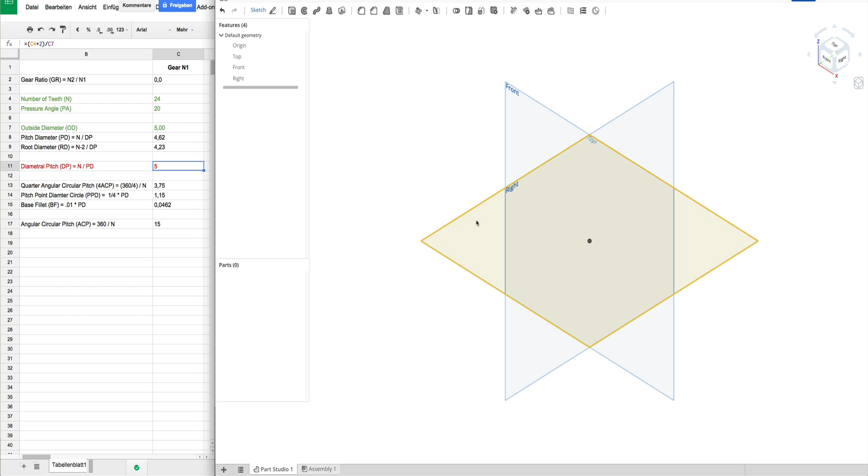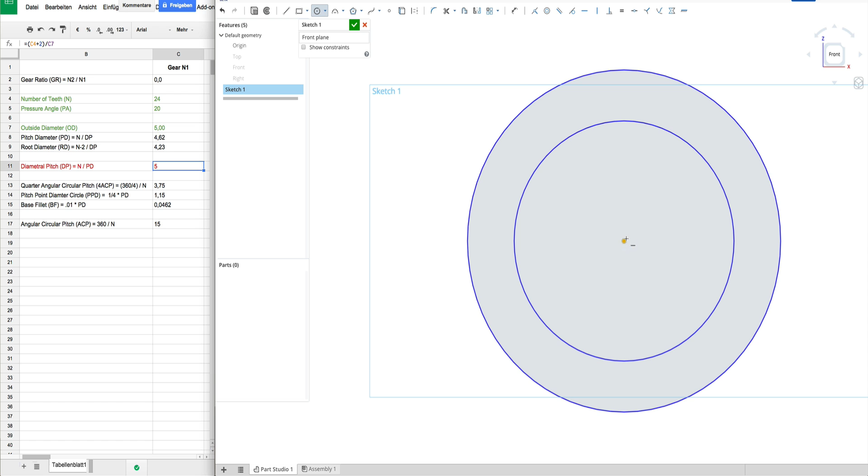First of all, I make a sketch on the front plane. The first thing I do is draw all three diameters: the root, the pitch, and the outside diameter. The outside and pitch diameter I'm going to change to construction lines and give them the dimensions as per my calculations here. The formulas are on the side in case you're interested.

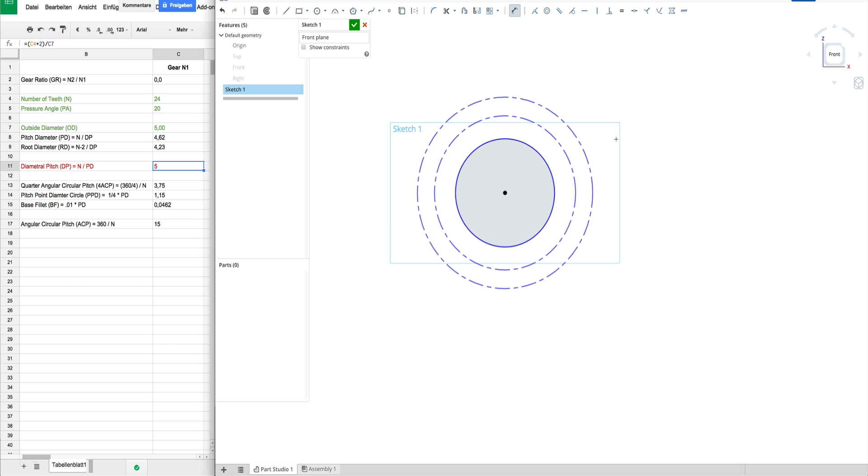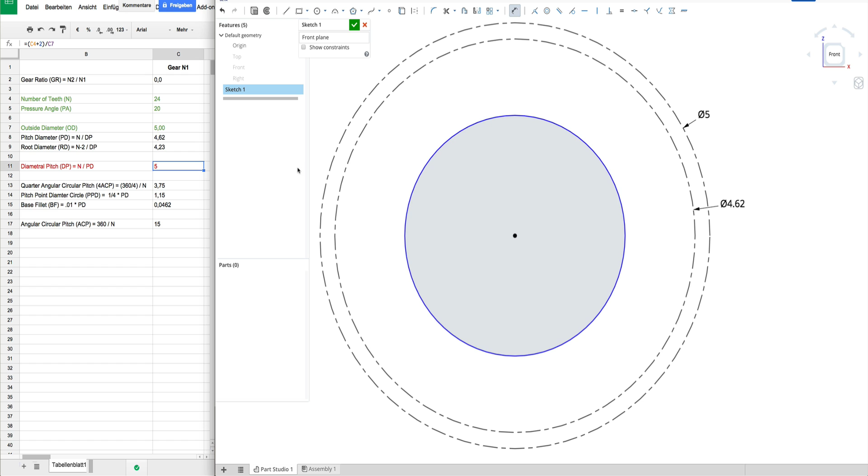So the outside diameter is 5. Zoom in. The pitch diameter is 4.62. And the root diameter is 4.23.

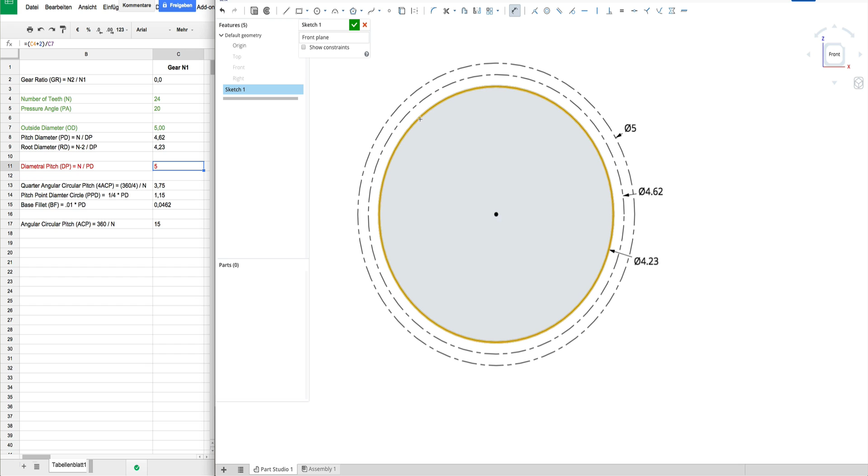Just for clarification, I'm not an engineer, and I did not read in great detail about gears. For me, it was just important to get enough information to model gears and make them fit into my design. So I just want to clarify that up front in case we have some experienced gear engineers. They might find everything a bit too simplified, but it works for me and hopefully also for other hobbyists that just need gears to make their parts work.

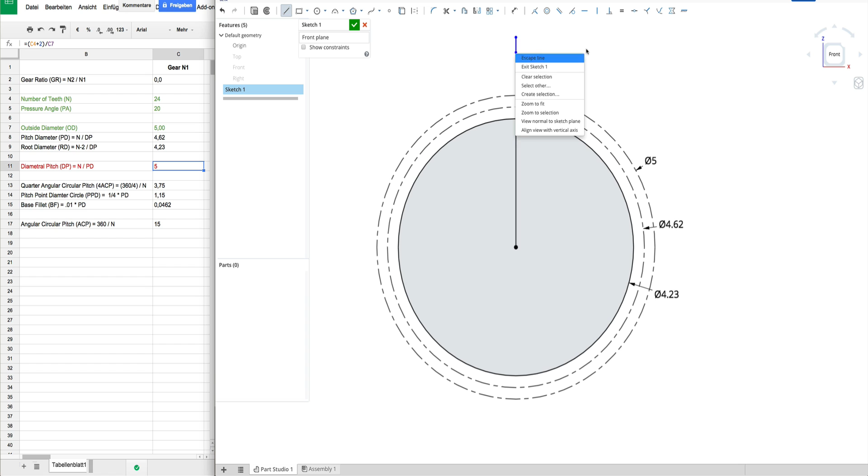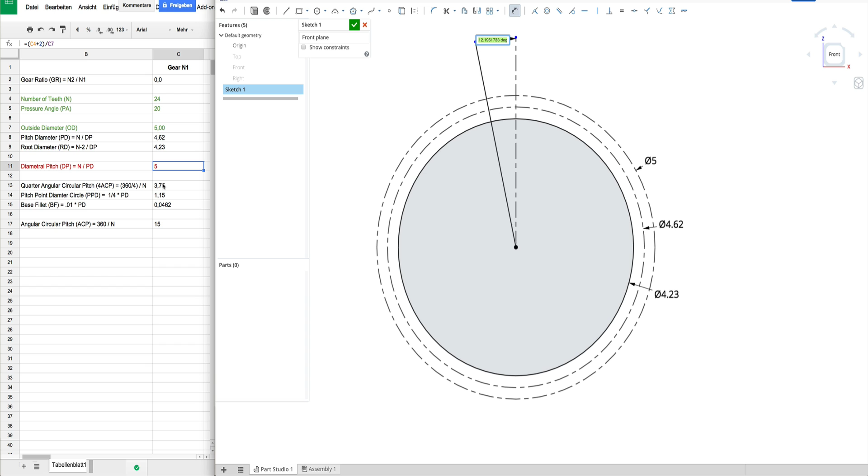Okay, so I have now all the diameters for my gear. The next thing I'm going to do is create a vertical construction line. I need that in order to draw the quarter angular circular pitch, which I need in order to draw the first quarter of my tooth. But we'll see that in a moment. So I draw another line and add a dimension here, and that is 3.75. Okay, I make this also a construction line.

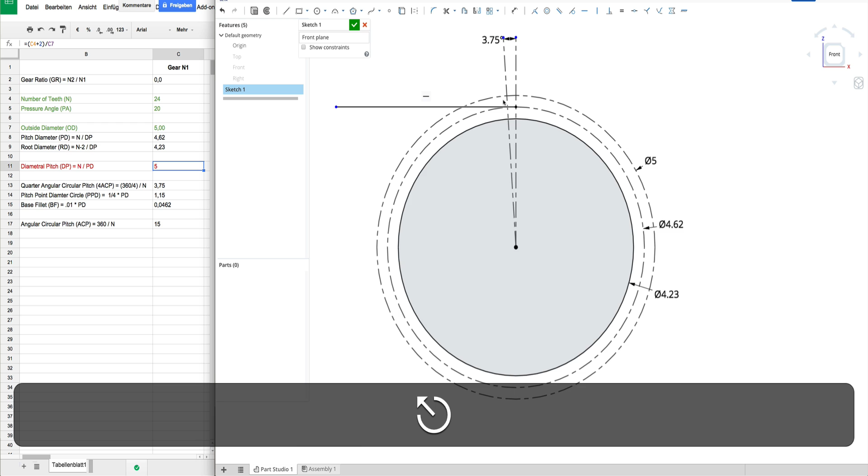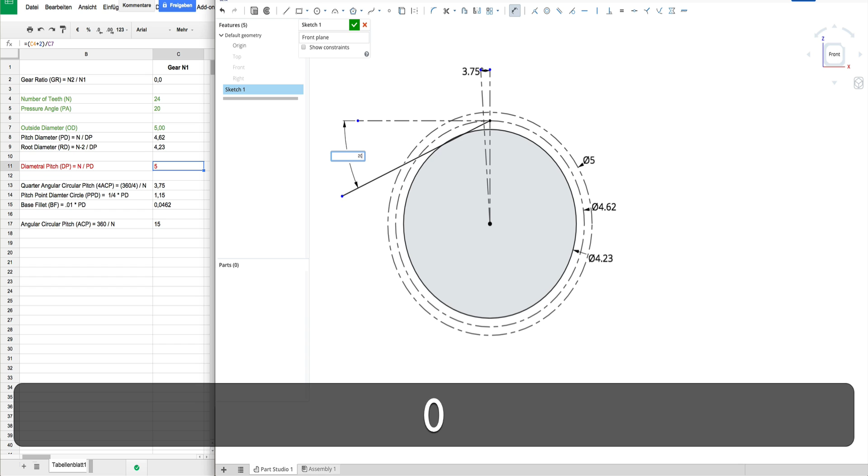And then another construction line, this time horizontal, at the intersection between this first vertical construction line and the pitch diameter. From here I draw another construction line, and this line is going to be the pressure angle. So this is between these two, and this is 20. I read that for gears, 20 and 14.5 are the most commonly used. In this example, obviously I used 20, but 14.5 I heard is also a very commonly used value for the pressure angle.

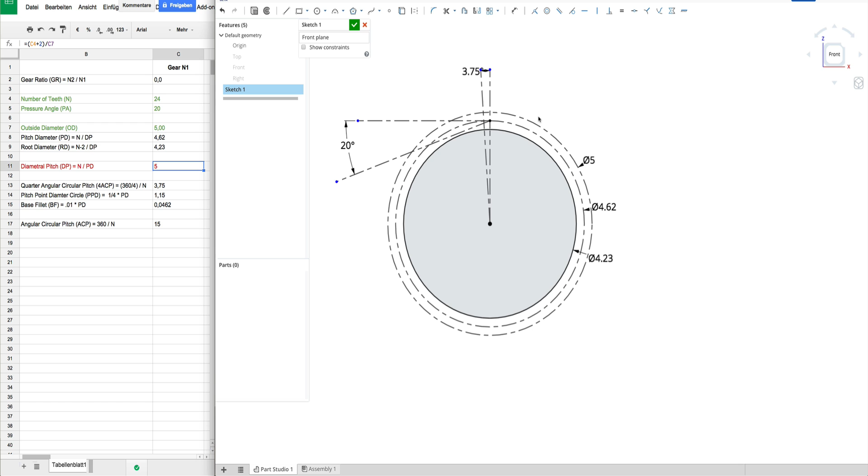Okay, with this completed, I can now start drawing the pitch point diameter circle. I need two. The first one needs to be at the intersection here with the pitch diameter. The value is 1.15. Okay.

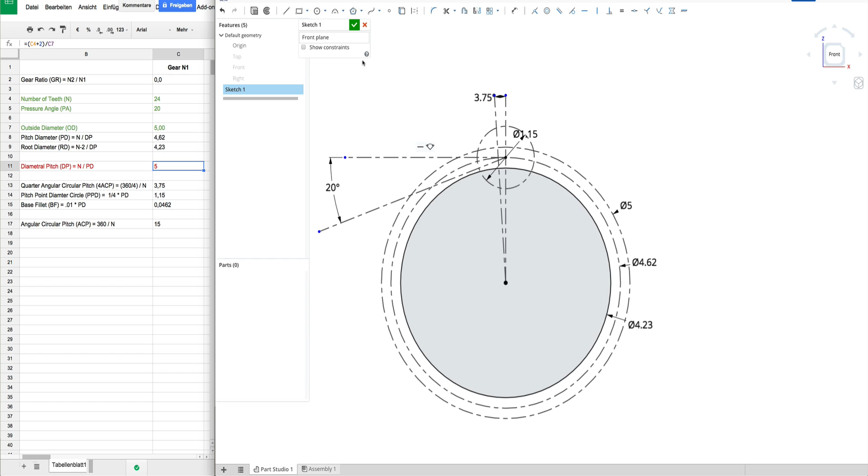I forgot one thing, but it doesn't matter. I can show it now. The reason I drew this pressure angle is so I can determine where my base diameter is. There's also a formula to calculate it, but I found this way much simpler. So if you have your pressure angle line figured out, the only thing you need to do to determine your base diameter is draw a circle, as a construction line, and make it tangent to this line, and this is now called the base diameter.

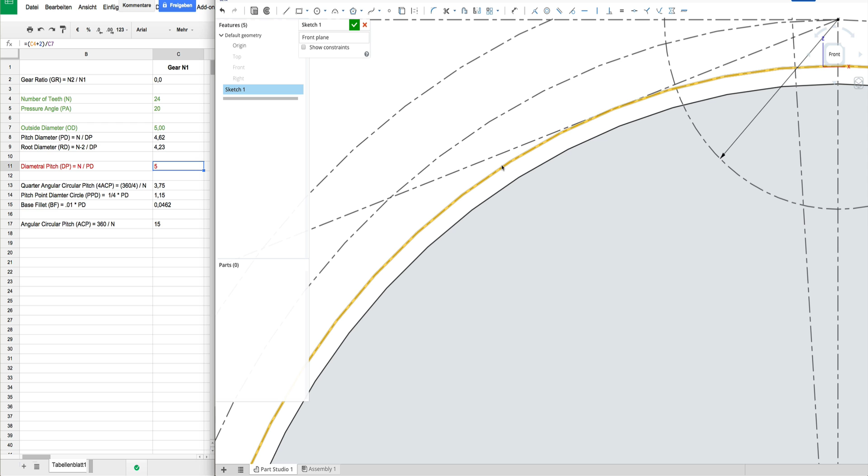So if you look around on the internet, yeah, that is what it is. This is going to be the base diameter. So just for a quick overview, I don't want to make it too complicated: this is the root diameter, the base diameter, the pitch diameter, and this is the outside diameter.

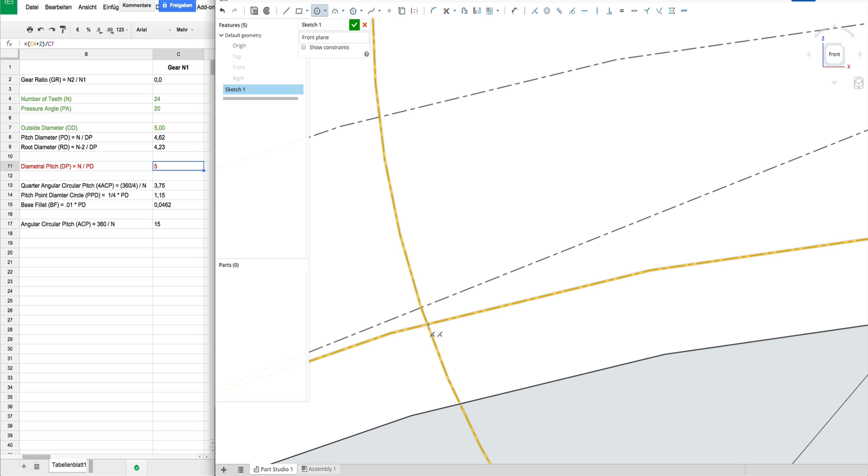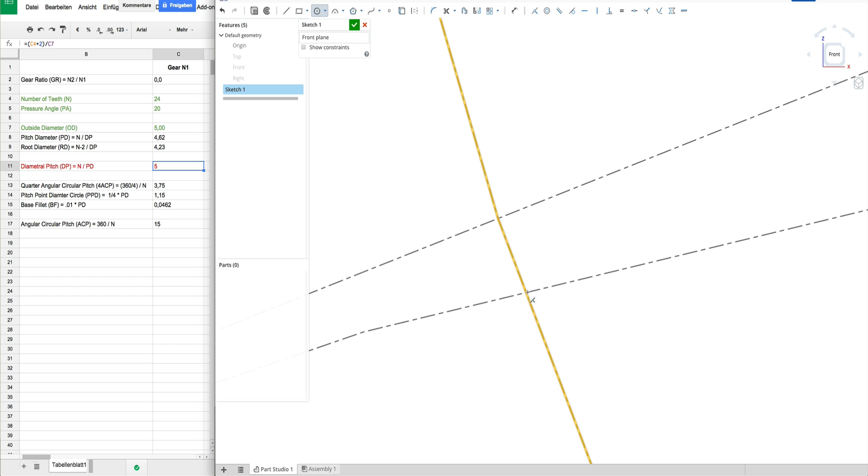Okay, now that I have the base diameter, I can draw my second pitch circle, and I have to do this at the intersection between the first circle and the base diameter, which is here. And I see here with Onshape there's a bit of offset. So let me cancel it and try again. It's still in the beta version, so that will be corrected, but I have to do it now by measure. I do it like this. Okay. And it needs to have the same size, so I mark these two equal, and they should have the same size. So that's fine.

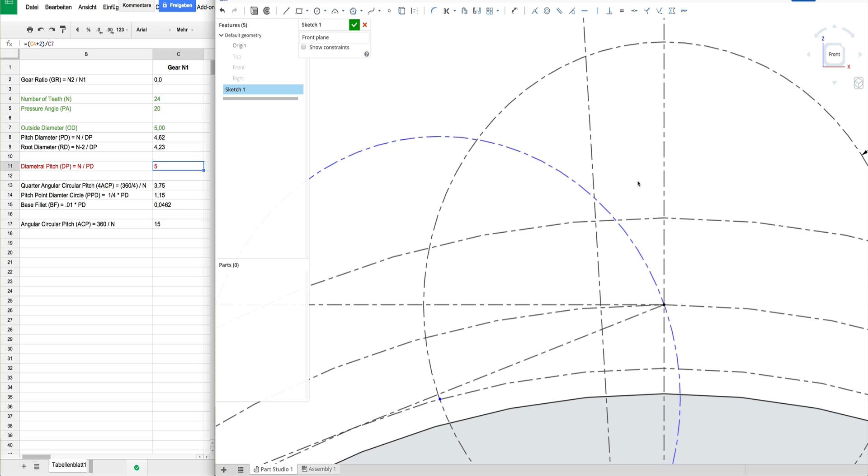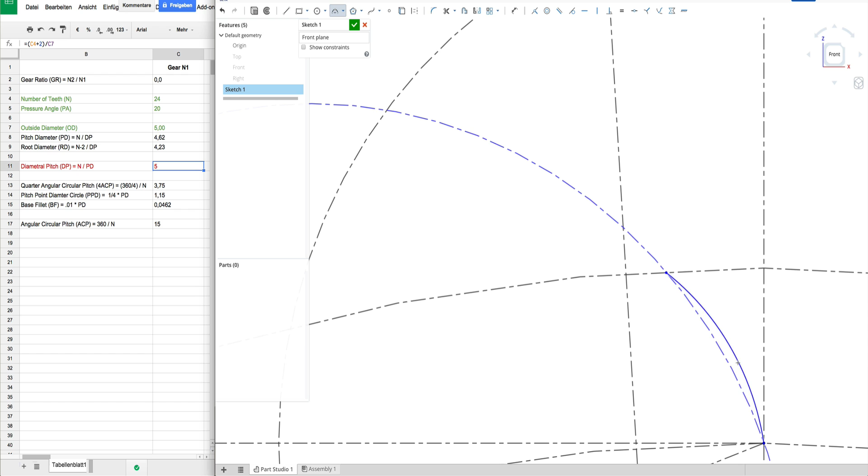I have now all the sketches I need in order to start with the tooth. I do one tooth and then I can copy it around using the circular pattern tool. Okay, I use this arc tool to outline where the tooth needs to be. So this is from here to here. That's number one. Then from here to here. And now I just want to make sure that these two lines are tangent to each other. Okay.

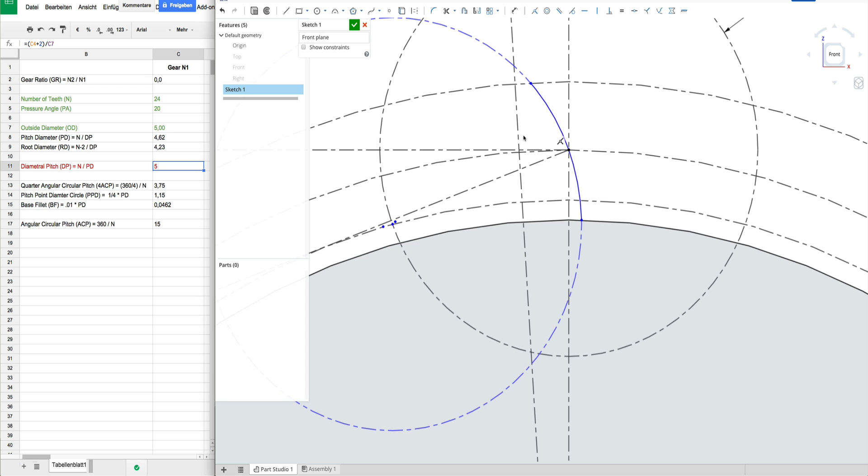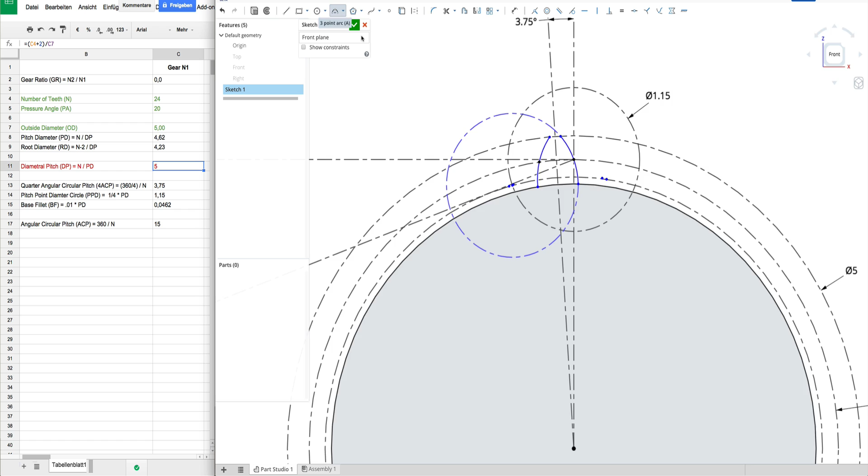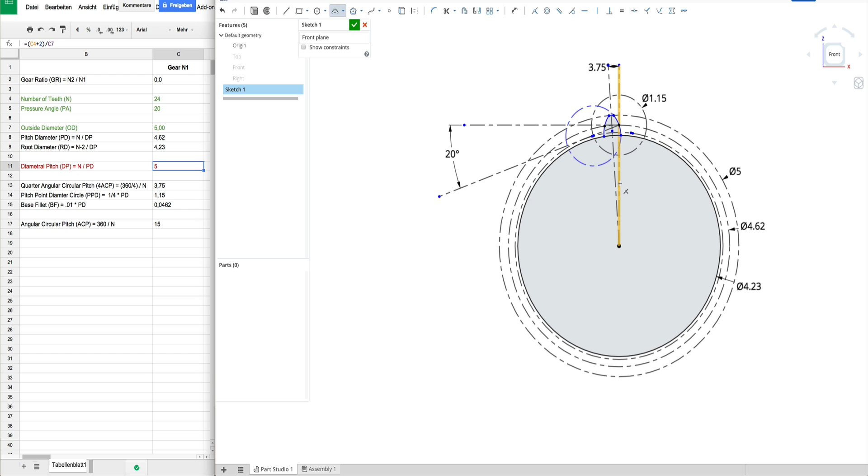I can then mirror the first half to the other side using this line, which is the quarter angular circular pitch I drew in the beginning. So that is going to be my mirror line. And then I close using these two. Okay, that's it. That is the sketch. I have now everything in order to complete the sketch, extrude and finalize the gear.

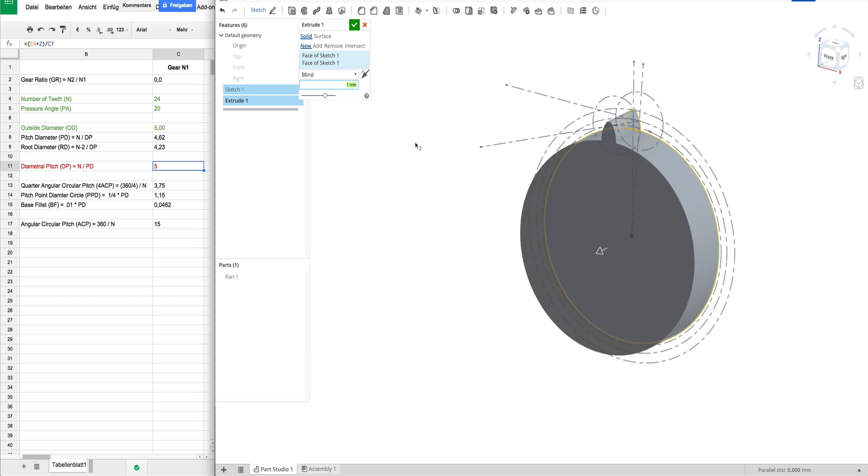So I finish the sketch, extrude the base, then the tooth, and I make it 1 millimeter in this case. Okay, and now I copy this around using a circular pattern. Axis first. Okay, now we can see the values on the table. We're using 24 teeth, and the degrees is 15. That's the angular circular pitch.

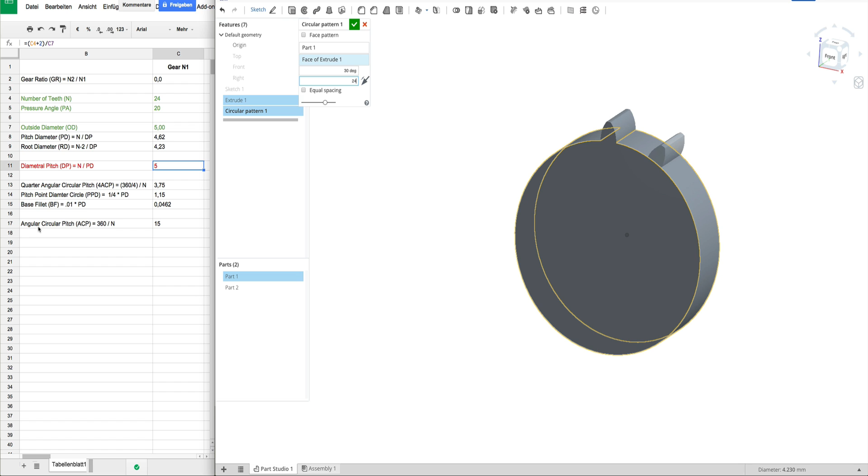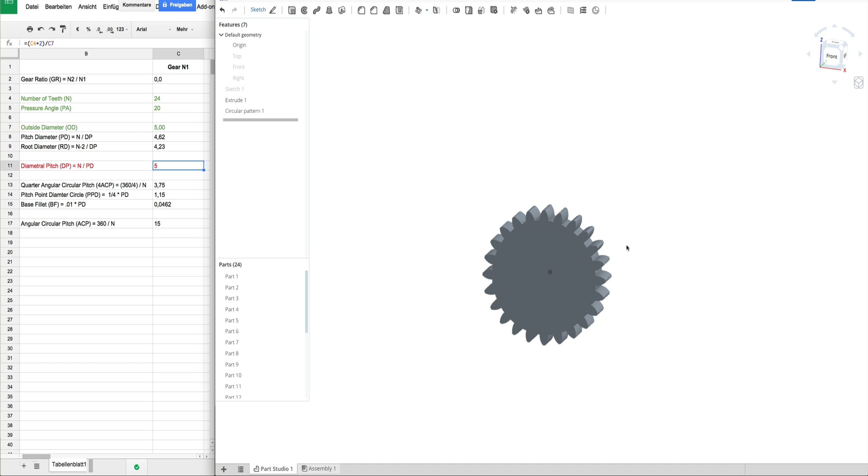Okay, and that's our gear. We have now a 24 teeth gear, and you see already they would match perfectly in this hole. So I'm going to probably create a second video where you have two gears interacting with each other, and also update this table. Once I have it completed, I will make it available for download.